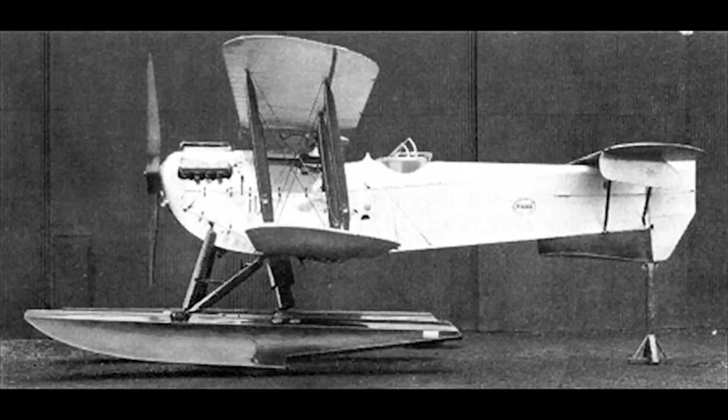The Pintail was the first entirely new aircraft that Fairey made after the First World War. Although it looks pretty conventional, it was in fact quite an innovative aircraft, built to meet RAF Specification 21 in 1919 for a two-seat fighter reconnaissance amphibian that could be operated from water or off a carrier deck. Fairey designated the aircraft Project 21.

It was powered by a 475 horsepower Napier Lion 5, which drove a large two-bladed propeller. The pilot had a fixed forward-firing synchronized Vickers machine gun. The observer had a Lewis gun on a Scarff ring. So far, so conventional. The design's main feature was the absence of vertical tails above the fuselage, which was intended to give the observer an unrestricted field of fire.

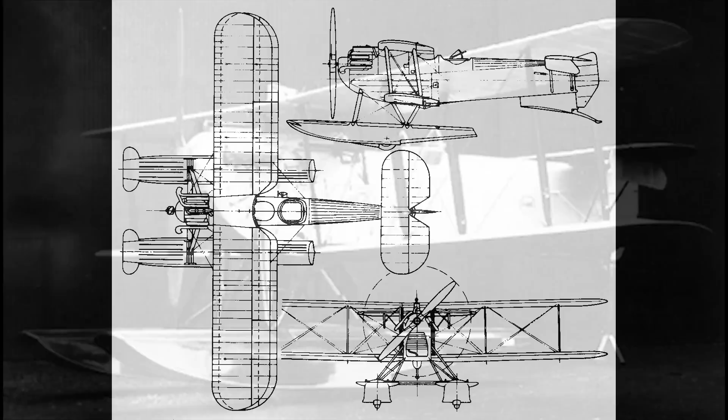The deep fuselage was built in three sections. The centre was made of steel and carried the wing spars and the main undercarriage. Ahead of this was the engine, its mountings and cowlings. The rear fuselage section also carried the observer's cockpit. The two-bay wings had a span of 32 feet and 400 square feet of total area. They were fitted with Fairey's patent camber gear.

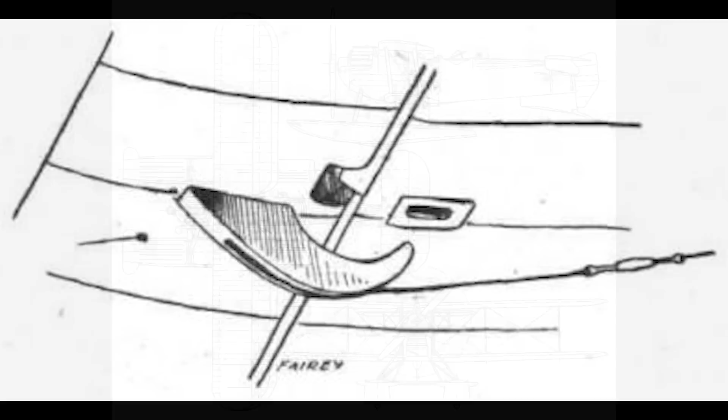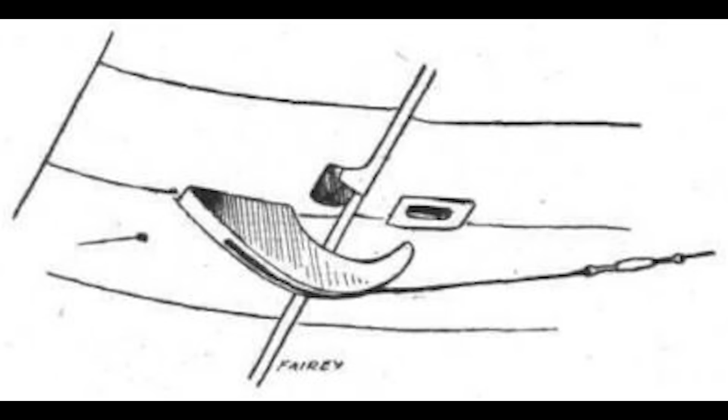This system had been introduced on the Hamble Baby, and it allowed the ailerons to be used as flaps during takeoff for extra lift. They were lowered by rotating a hand wheel in the cockpit. Pretty much all Fairey aircraft of the era had this system, as it allowed impressively short takeoff and landing runs.

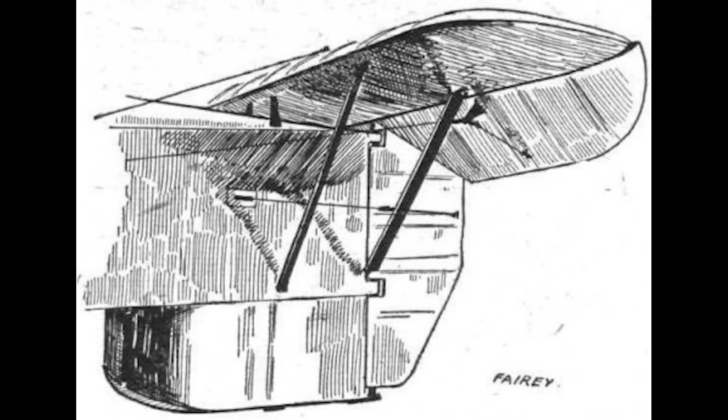A new feature for the Pintail was interconnection between the camber changing system and the tailplane adjustment wheels. They were on the same spindle so that fore and aft trim was automatically adjusted to compensate for the change in centre of pressure brought about by raising or lowering the flaps. The controls also featured some balancing improvements that reduced control forces. The wings could be folded down to 15 feet and 8 inches for shipboard storage if required.

Upper and lower wings were staggered, with the top wing being very close to the fuselage. This setup was beneficial aerodynamically, but it made cockpit ingress difficult and restricted the pilot's visibility in basically all directions. This was a bug, or perhaps a feature, of several contemporary aircraft. Designers were trying to push designs to the extreme to take advantage of new and more powerful engines.

And on the engine front, another innovation on the Pintail was the provision of a starting battery so that the engine could be started without physically moving the propeller. What luxury! There was no generator, so the battery couldn't be charged in flight, but the electric start was a significant step forward. Four distinct versions of the design were constructed, starting with Pintail 1, aircraft N133.

This made its first flight on July 7, 1920, and it was originally fitted with amphibian gear in which the wheels, mounted on a swinging frame, were, when retracted, housed within the floats. These had spring-loaded doors over the wheel wells. The arrangement wasn't successful, because the doors could not be kept watertight when closed and mud collected in the wheel wells when they were open.

The complete package was, however, not purchased by the RAF, as they were busy trying to save the service and were buying barely any aircraft. Pintail had decent performance with 125 mph top speed and 1500 foot-per-minute climb rate. It was therefore rather faster than the Parnall Panther fleet fighter of 1918, but not sufficiently spectacular to justify the RAF buying it.

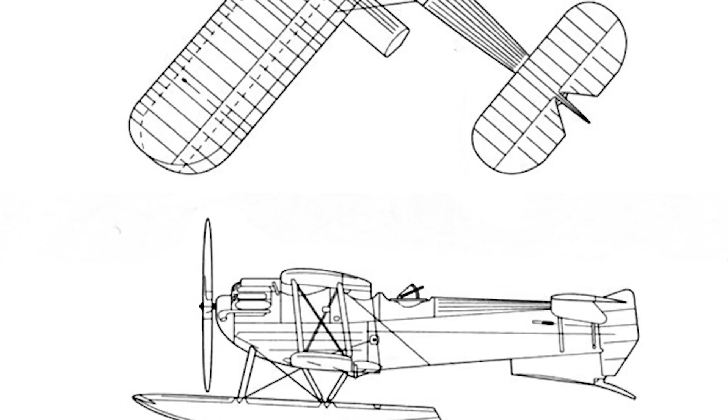Three examples were, however, picked up by Japan as the Pintail 4 as late as November 1924. That had some modifications to improve visibility and pilot comfort. The upper wing was raised 9 inches and the floats were further refined. That cost 50 pounds in weight but had little impact on performance.

Exactly what happened to these aircraft is not clear. They aren't mentioned in any of the major histories of Japanese interwar aircraft. Although the Pintail was rejected for naval use in the UK, it didn't actually die there.

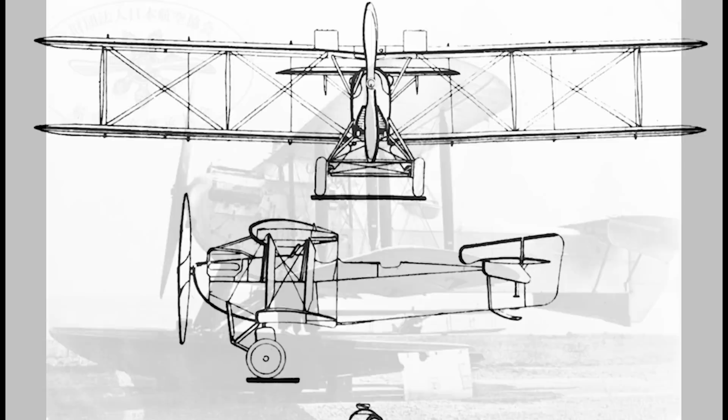In 1921, the RAF issued a new specification for an Army cooperation aircraft. It was very unambitious, essentially asking for an aircraft that could carry a heavier bomb load than the Airco DH-9, but was 6 miles an hour slower. The DH-9 dated back to the summer of 1917, and it had been introduced into service in November. In response, Fairey essentially created a land-plane version of the Pintail that they called the Fawn.

These days, advertising standards would probably want a word with the company. The Fawn was not a looker. In fact, it was actively scary looking from some angles. It did, however, retain the Pintail's stable handling and rugged construction, based around the steel centre section.

70 were made in 3 versions, with the later 2 and 3 serving as light bombers, carrying a 460-pound bomb load that consisted of 2 230 or 4 112-pound bombs on underwing bomb racks. Power once again came from a Napier Lion, although the early aircraft had the 450 horsepower Lion 2 rather than the 475 horsepower Lion 5. In reality, this made no practical performance difference.

The size of the Lion engine gave the Fawn the same issue as the Pintail, in that the very large engine restricted the view forward. A big change early in development was triggered by a change to the Air Ministry's fire protection requirements. This led to the fuselage fuel tanks being deleted, leaving an unfilled void.

Fairey themselves were disappointed with the aircraft, and they were critical of the unambitious initial specification and shifting detailed requirements during the development. They felt that the ministry was unwilling to engage in dialogue with suppliers and thus ended up with an unimpressive product. Charles Fairey's response was the revolutionary Fox, which was one of the aircraft that shook the British establishment out of its post-war malaise and created the conditions for better-known aircraft like the Hart and then the Hurricane and the Spitfire. So, because of what it wasn't, the humble Fawn is arguably one of the most important aircraft of the interwar period.